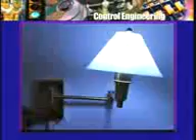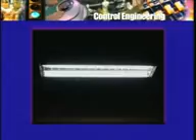Of course, as we all know, with every light there is a switch. And so this is the simplest type of control situation where you can either have something on or turn it off. These are indeed called on-off control systems. They can be as simple as a switch which turns a light on or turns a light off. There is no other option. You can either have the light on or you can have the light off.

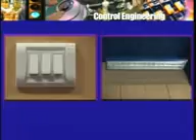Of course, it does happen once in a while that you try to turn the light on, you turn the switch in the on position, but the light does not go on because of some problem with the light itself. Maybe the bulb has fused, or the starter is not working, or the choke is bad, or whatever. So in that case, there is no control action possible. You would like the light to be turned on, but it just cannot be turned on. But we normally expect that the light switch will work and you will be able to have the light either on or off.

If the incident light that comes from the window is adequate, you may want the light off. But if it becomes cloudy, then the light is not enough. You will get up from your chair and turn the light on.

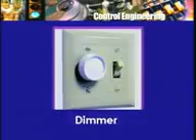Of course, one can have a much more sophisticated illumination system, as in a big lecture hall or a theater, where it's not just one light to be turned on or off, but a large number of lights, some of which may have to be turned on depending on the requirements. There is also provision for what is called dimming of light, where lights are gradually dimmed or made bright. So this illumination control is a big area, but the simplest example of that is our ordinary light with a switch.

Of course, when you have lights which can be dimmed, then the control is not simply on-off. We'll see more of such things a little later. What else do you see in the room around you?

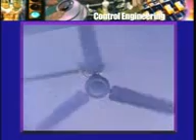Maybe above you or on the floor or on the wall, you see a fan. For example, there is the ceiling fan. Now that's also another control situation. If it's cool enough in the room, if there is fairly good breeze, then you may not want the fan on. But if it gets hot, you will get up and turn the fan on.

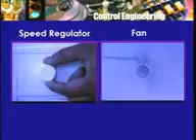But there is something more that is possible with the fan usually. There is also an arrangement for controlling the speed of the fan, called the regulator, the fan regulator. Because you may not want the fan to run at only one particular speed, you may want to adjust the speed depending on the conditions. Some people like to have the fan on at full speed. Others, like me, are uncomfortable if the fan is on at full speed. We like to run it at a low speed, just enough to produce some breeze and some ventilation or circulation of air.

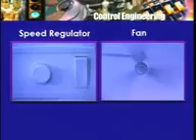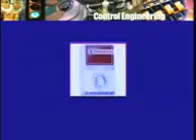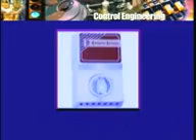So in this case, the fan has an on-off switch, of course. You are able to turn it on or off. But in addition to on-off control, there is something more, namely the speed can be adjusted. Now, the old kinds of fan regulators had what are called notches. So you change the speed from a 0 starting position to position 1, 2, 3, maybe full on. You make it click, click, click, click. So that's how you change the speed. So the speed can only have a few levels as its values.

The position is either 0, that is the fan is off, or 1, 2, 3, 5, or 6, maybe it's full on, that is at the maximum speed. So here the choice is not between just on and off, but between one of a number of levels or values.

Such a set of values is said to be a discrete set. So this is an example of what could be called a discrete valued control situation. Here you choose not between just on and off, but between more than two possibilities, namely 0 speed, full speed, or speed in between 0 and full.

Of course, nowadays we have fan regulators in which the speed can be varied almost continuously. So this kind of control action is called a continuous type of control action. You have a knob and you can turn it smoothly from one position to the other, going all the way from almost standstill to full speed.

So besides the on-off control, which gives you only a choice between two values on and off, you may have a continuous type of control action in which, on the face of it, you can vary the speed in any way you like, or it may be discrete, where you can select the speed or whatever other thing one is trying to vary between a small number of values. So on-off control, discrete valued control, and finally continuous control.

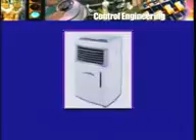Anything else that you see? Well, maybe you are seated in a room where there is an air conditioner, or very often it is just an air cooler. An air conditioner actually should condition the air, should control the humidity and the quality of air and so on. It should provide air coming from outside occasionally so that the air is refreshed. But usually what we have are only air coolers, although they are called air conditioners.

Now here is another control situation. Of course, once again we have the on-off case. You may have the air conditioner switched off or you may have it on. But here you do something else.

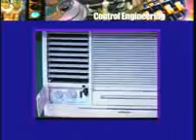You set the temperature that you want. There is a knob or a control on the air conditioner panel, and you turn that knob or adjust it. Nowadays there are cordless control units for air conditioners. You point your cordless unit after setting it and the temperature gets adjusted.

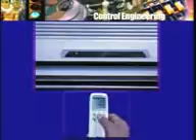Now here again you can set the temperature to any one of a range of values, maybe going from 25 or 27 degrees Celsius down to maybe 17 or whatever. It may be too uncomfortable, but still whatever suits you.

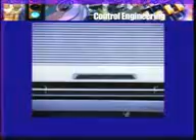So there may be what looks like continuous control action possible. You set it between a range of values, but there is a difference between this control situation and the earlier one where you turned the fan on or the light on or off or adjusted the speed. And what is the difference?

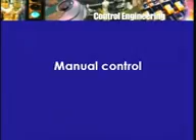The difference is as follows. In the case of the illumination control or the control of the fan, the control action was what can be called manual. In the sense, you had to get up, turn the light on or turn it off, or had to turn the fan on or adjust its speed. So this is called manual control action.

And here is your first little exercise. I'd like you to look up a good dictionary and find out how the word manual, M-A-N-U-A-L, originated. What is the root of this word? As you know, many English words have arisen from either Latin or Greek or other European languages which are older or related to English, like German or Dutch or French and so on. So find out the origin of the word manual.

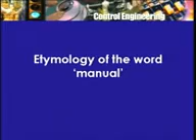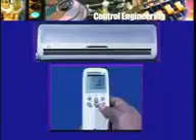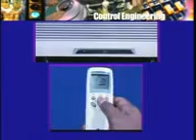So that's manual control. In the case of the air conditioner, the control was partly manual because you had to set the temperature. You had to set the knob, or on the cordless unit, you had to set the temperature by pressing some switch or a button. But thereafter, you don't have to do anything. What happens is that as time passes, let's say it's getting hotter and hotter outside...